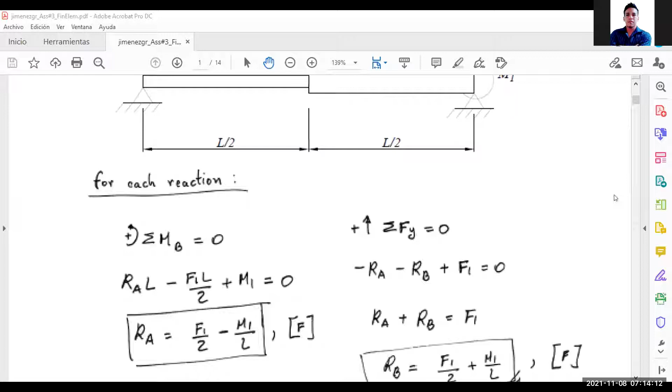Okay, so you are Mr. Jimenez. I'm going to give you permission to share the screen. I make you co-host so you can share the screen. Give me a second, Doctor. Sure, no problem. The other students, please, ask questions if something is not clear. So today, Mr. Jimenez will take my place. The second problem. Can you see my screen? People, can you see Mr. Jimenez's screen? Yes, doctor. Okay, go on.

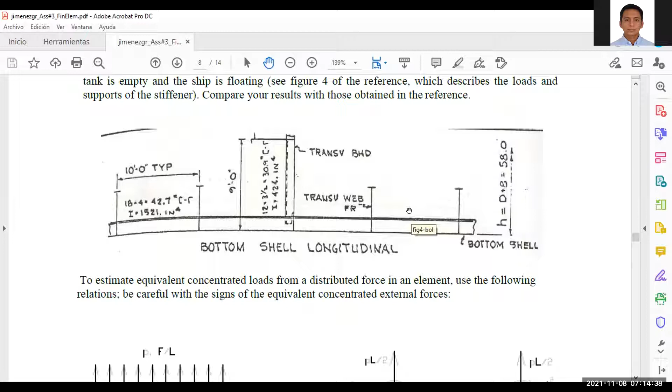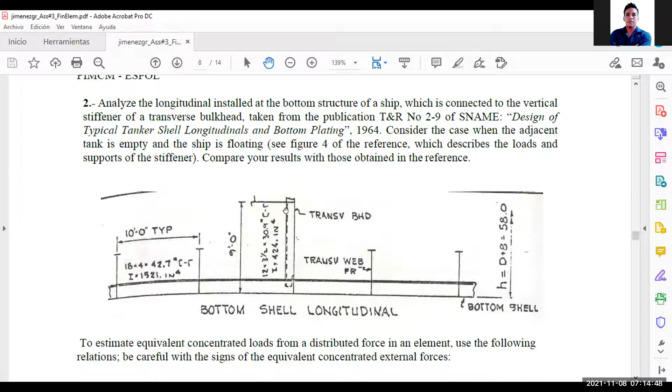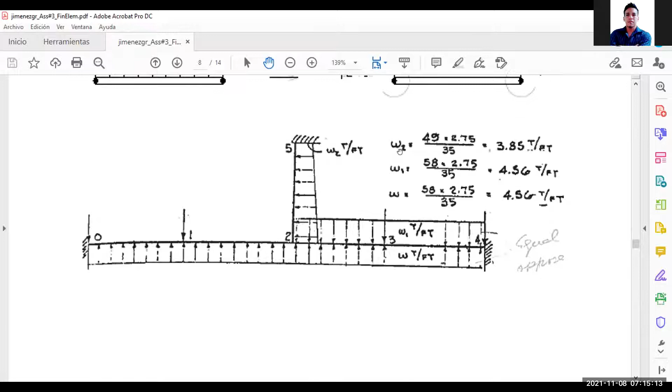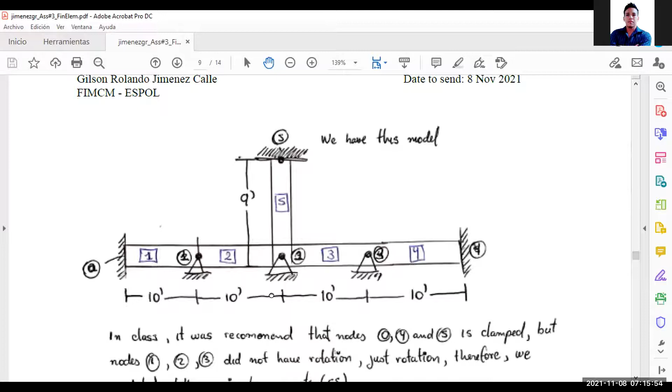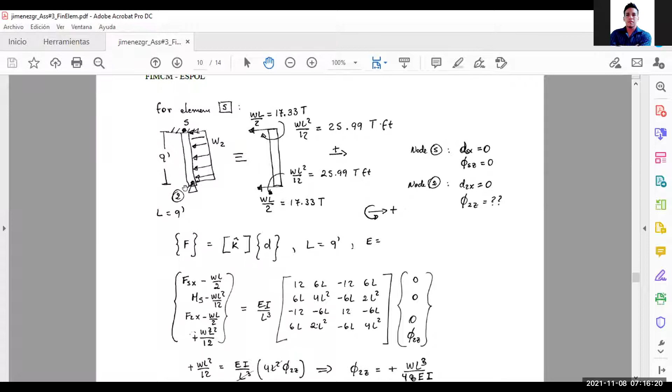For example, when we checked in the last class, you said that in the first joint we had it clamped, this end clamped, and the top is clamped. But at this point we just have rotation, no vertical displacement. Then here I'm going to analyze the element 5. I can get the rotation in the second one.

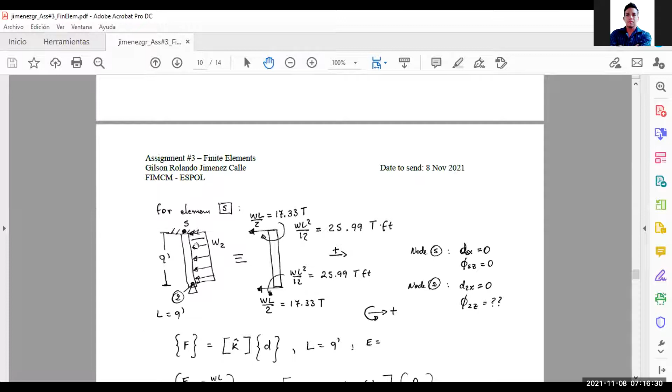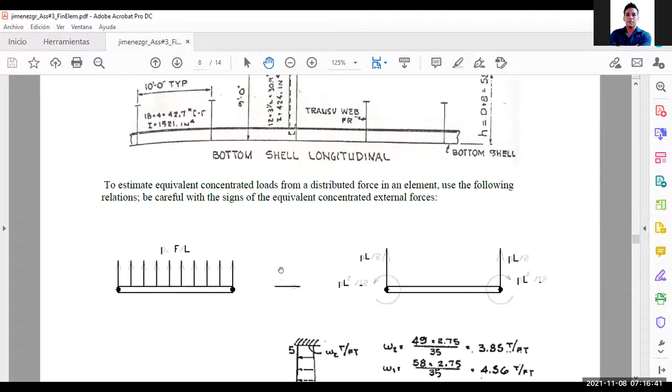This is the distributed lateral load over the beam, right? You have to consider the equivalent load on the ends of the beams, right? Now for the longitudinal, in this part we have the effective nodal force. It's like the reaction of the force and the equivalent force on the ends, right?

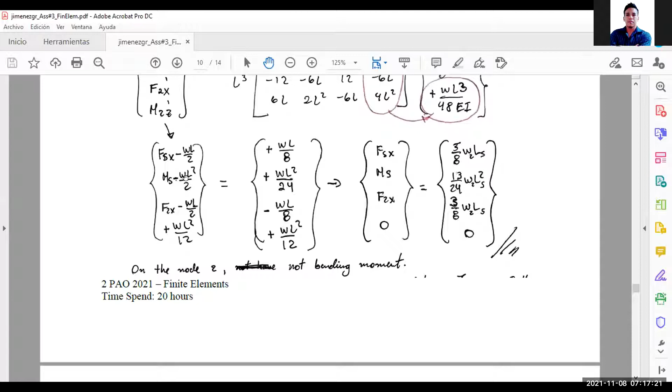For example, this is the value and this is the bending moment. No, that's not bending moment. That's external force. External moment. Right. Please remember, there is a difference between external and internal forces. Okay, go on. Sorry. No problem.

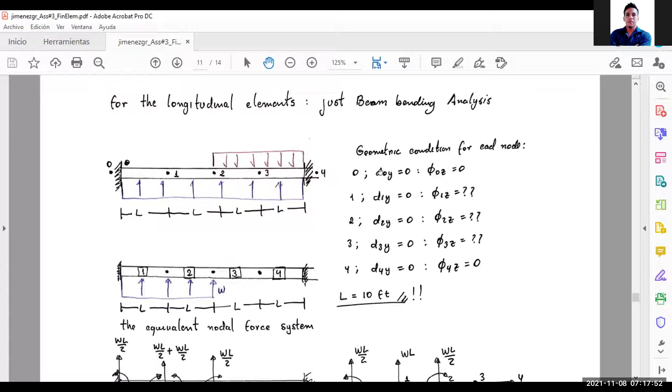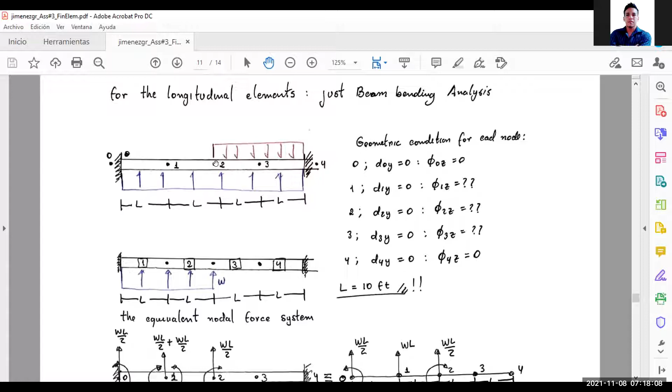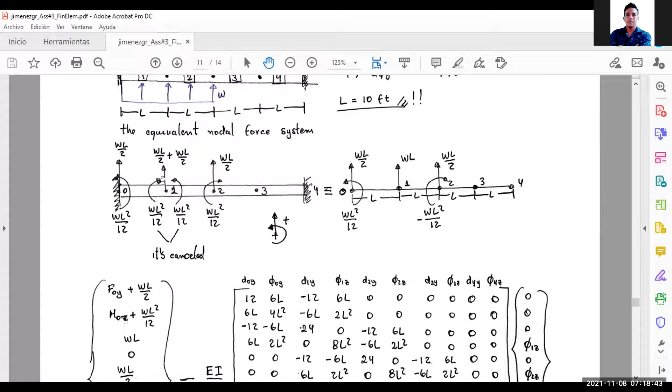For the longitudinal, we consider the geometry condition for each node, and we have this lateral load. It's the same value downward and upward in this part, just from the second node to the fourth node. And here we use the same on the right. We have the same length for each element. At the first node, we get the same external moment, and this cancels, right?

This is the equivalent system. We get the global stiffness matrix and the force vector. Just a second there. Anybody have any question, any comment on this matrix? Mr. Arias, do you have any comment on this? I don't use this matrix. I use another matrix. And why is it a different matrix that you use? I use a matrix that is symmetrical about the diagonal. This is also symmetrical.

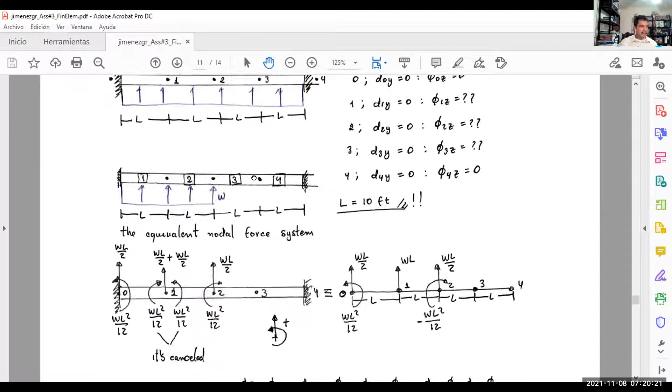Yes. But in the matrix that I use, I put the cosine and sine and the inertia. He's using the inertia here too. Yeah, but not the same inertia along the. Yeah, I know. There is something that I don't like here, but I want somebody to point it out. Mr. Zambrano, any comment on this matrix, on this system of equations? Good morning, Doctor. No, I cannot see the error, sorry. I'm not talking about errors. I'm just talking about differences.

Ms. Pinkai, can you say something about this matrix? Any comment? I also use the matrix that has sine and cosine for element 5 because it's vertical and has an angle with the global reference system. So, as a result, in this case, how many degrees of freedom did you include in your work?

18. 18. So you have 8 more than him. What's the difference? Yes, what's the difference? I didn't simplify the distributed force. No. There's something extra. Let's go on.

Miss Gutenberg, any comment on this matrix? No, I think no. No? Doctor, I think that... Who is talking? Who's talking? Arias. Okay, go on. Jimenez doesn't consider the force in direction X. Yes. That's the problem.

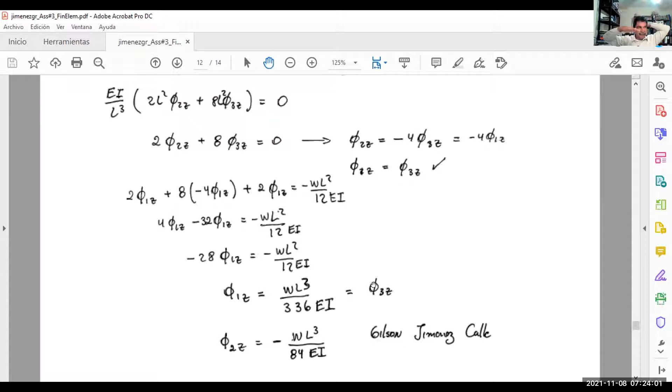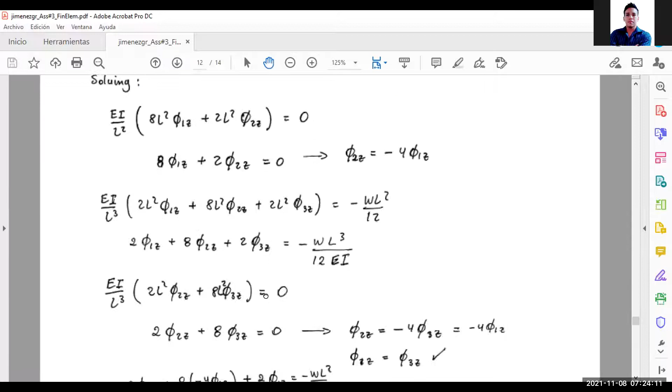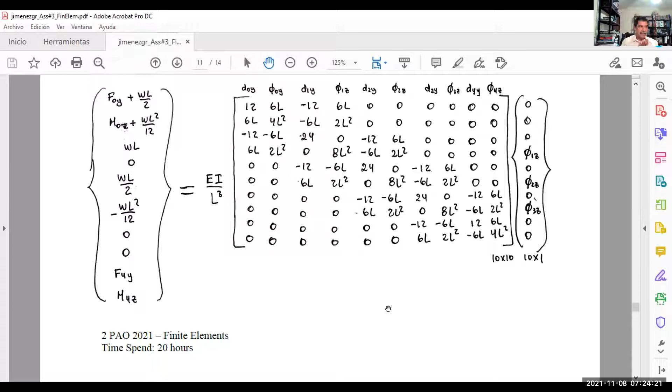Okay. But see, which is very strange... not very strange, but you are not including values so far. It would be easier, instead of handling all of these equations, to replace the matrix by values and solve it. Okay, replace them here. Yeah, what I'm saying is that instead of having it with just symbols, it would be easier to work with values. Okay, thank you, Mr. Jimenez.

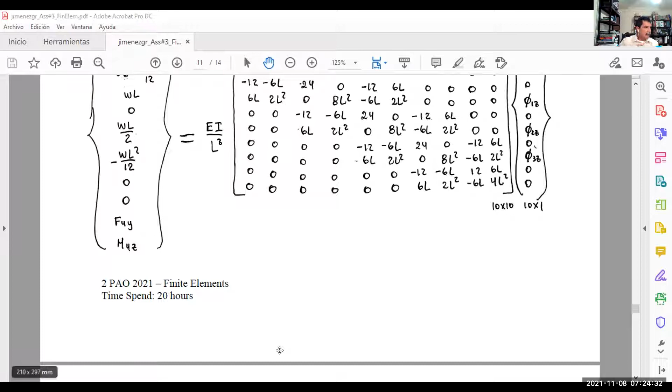Anybody else? Any other person who wants to share his or her work? Please. Or you want me to select somebody? Please, I need a volunteer. Come on, people, it's Monday. No? Okay, I'm going to select. Mr. Cano. See, I put a random number on each name, and the largest number is 0.899. Mr. Cano, are you here? No, he's not here. Okay.

Mr. Galarza? Good morning, Doctor. I'm here. But I have a problem with my Zoom. When I share the screen, the computer crashes. So let's do this: try to explain your work, especially emphasizing the differences with the previous work presented by Mr. Jimenez. In the meantime, let me open the website so I can see your work and present it, so you can explain it.

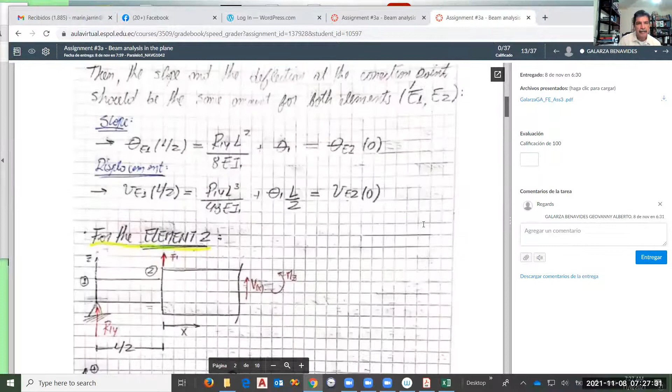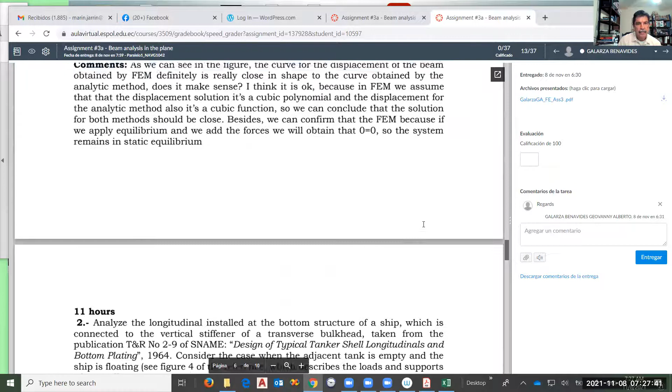So here we are. That is 3A. Let's go to Galarza. There you go. Oh, it was easy. Let me share the screen. Can you see your work, Mr. Galarza? Yes, I can see. Let me try to enlarge it. Okay, go on. Let's go to problem 2. This is your work. You tell me if I should go down or up.

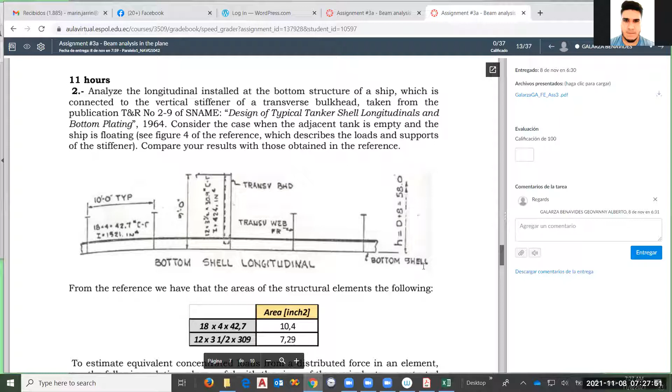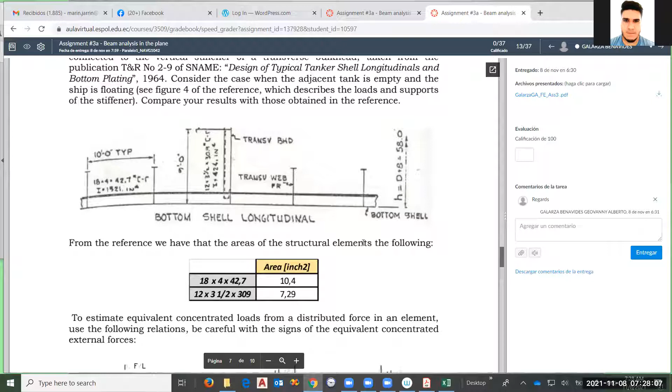So first, I was a little confused with the matrix that I have to use, so I checked the previous class. In one class, you showed us how to overlay the effect of a beam and a bar. I tried to solve that system, put it together, and found a 6 by 6 matrix. With that matrix, I started to work. This is the discretization. I consider 5 elements and 6 joints.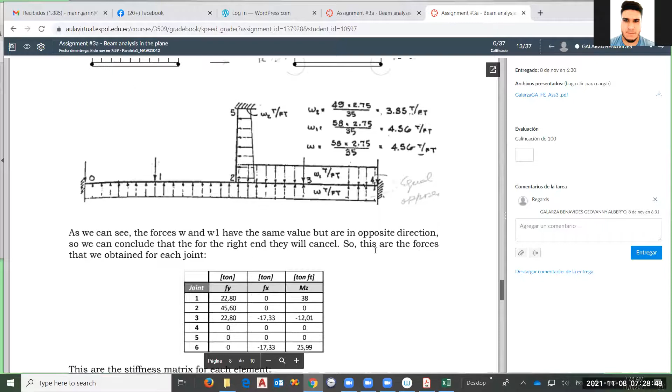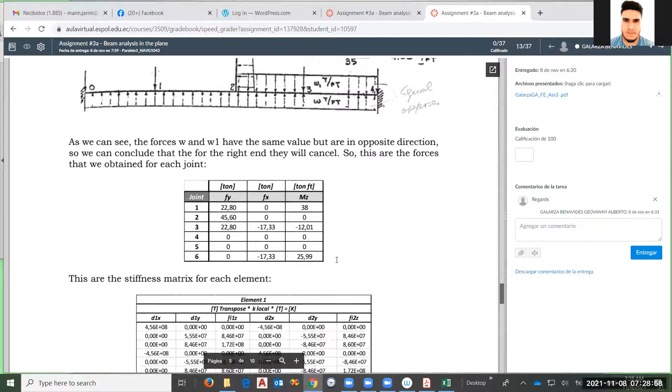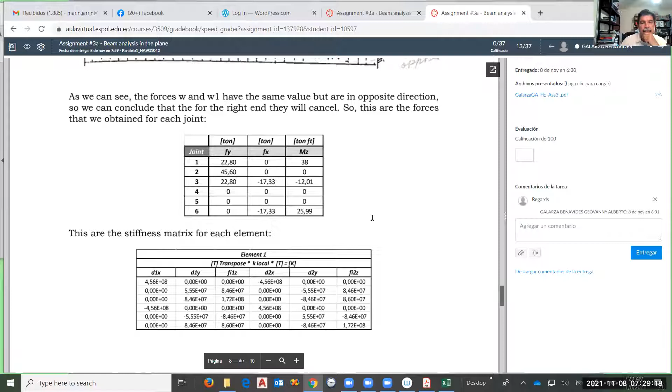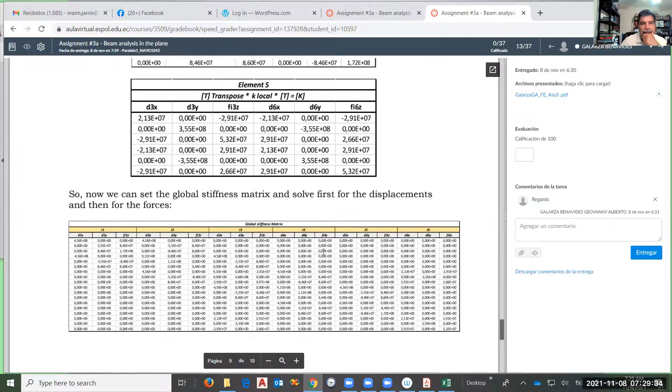And then I found the reaction forces applying the method attached in the homework. I split it in the nodes and got these values. So you have forces to the left, forces upward, and moments. Good. The forces to the left are in the vertical reinforcement. Then I found the stiffness matrix for each element in Excel: 2 for the second, 3, 4, 5. And then I have to put all in the big matrix, so I have to find the 18 by 18.

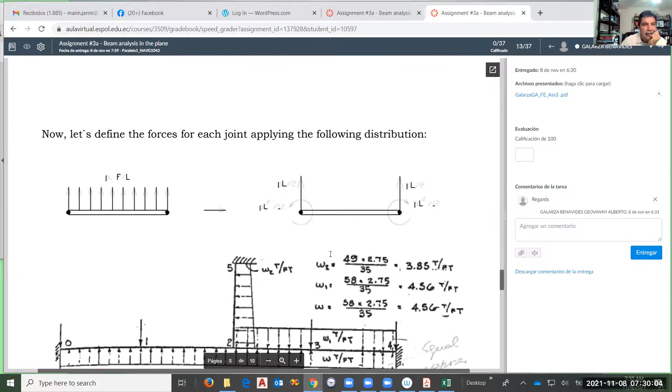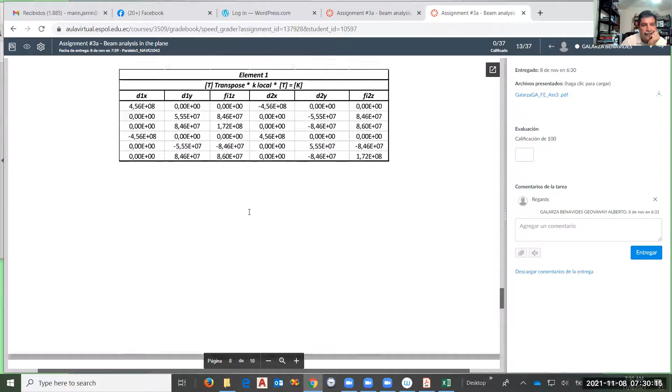Right. And I put the elements. I mean, from the horizontal stiffness, I put like 1, 2, 3, 4 aligned. Yeah. So it was easy to put in the big matrix. Let me go back just a second. Okay. 1, 2, 3, 4. Oh, this direction. And then 3, 6 is what was more confusing. Yeah. That was a different one. That was element 5. Yeah, this element 3 and 6.

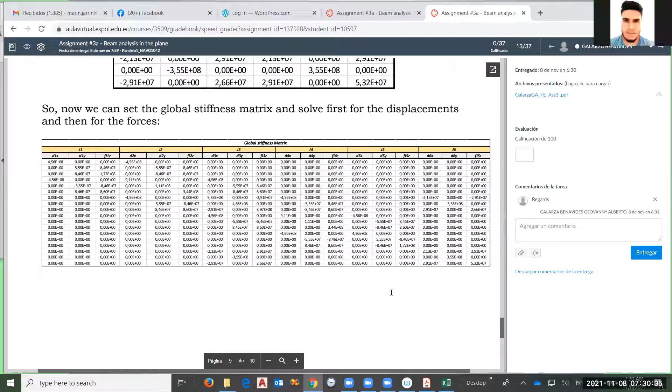Okay. Go on. So then if you go down, here to solve this matrix, I did the process that you teach us in class. Put the forces and the geometric condition. And if you go down, I have the solution. And I found the displacement. The displacement you see here in the first joint is not 0, but it's very small. Okay. Similar here.

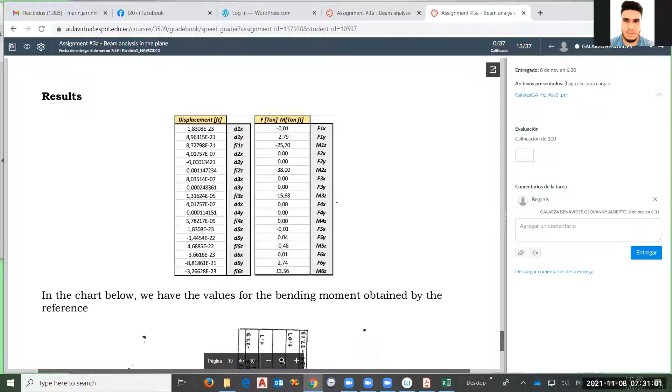And then I have the results. This is feet, and the force is in tons, and the moment in ton-feet. Okay. And then I tried to compare with those values, but honestly, I get an error a bit higher. But I think it's not about Excel, because I tested with the exercise that we did in class and I obtained the results.

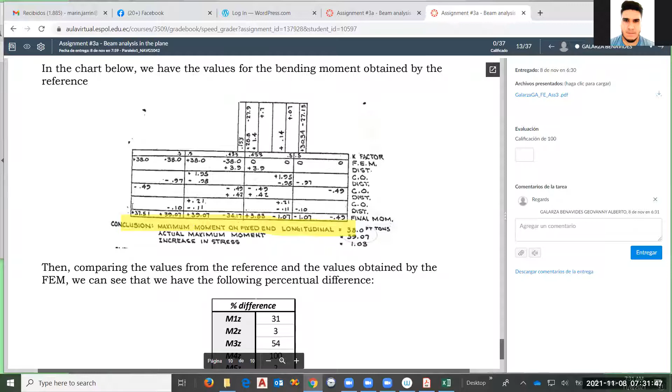So you only checked. The thing that I think I have to check is the forces, because with those forces we solve the matrix, and it all depends on the forces. I was a little bit confused when I tried to determine the force. Okay, but I think the problem here is in the joints, that's something that we were discussing last night.

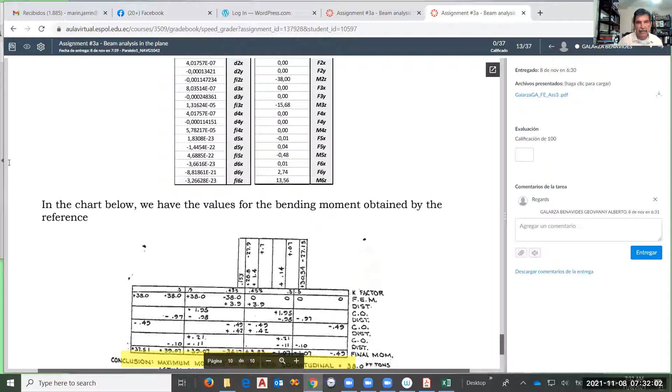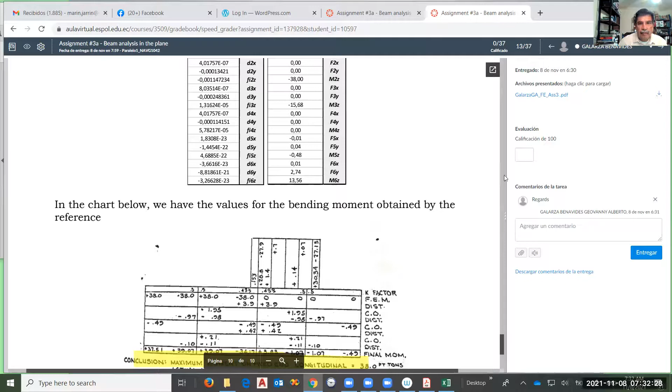Okay, let me try if I can draw on this screen. Can I? No, I cannot draw in here. No, you cannot draw here. I cannot draw here. But the thing is this, okay? Let me go back.

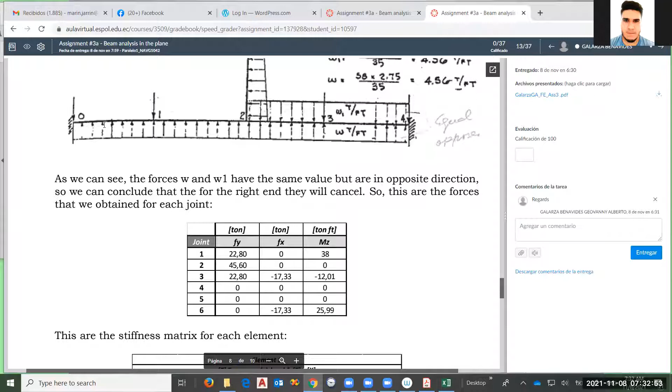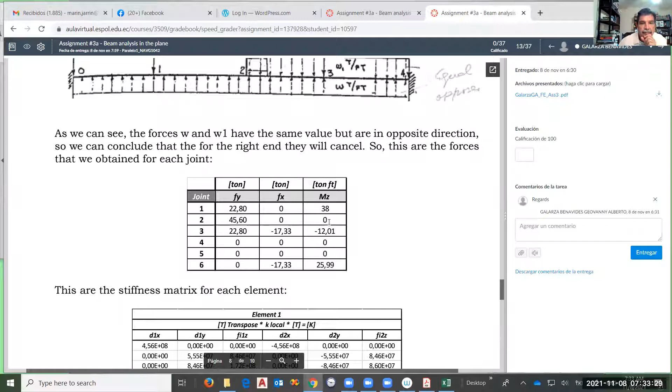For example, this is the moment, right? This moment is not the total moment here. It's not the reaction moment here. This moment is just because of the load here. So when you obtain the final value, this minus 25.7 is equal to the reaction plus the value up here, plus this one here. So you need to get this value on the right hand side, and then you will obtain the reaction. So that's something that we have to do.

This process here is something that we learned when I was at the university. It was called the moment distribution method, or the Hardy-Cross method. You start with certain values, and then you went on. In this point, when you have a connection, the moment has to be distributed. And that distribution depends on this K factor, and this K factor depends on the EI. A stronger beam would take more moment than the others.

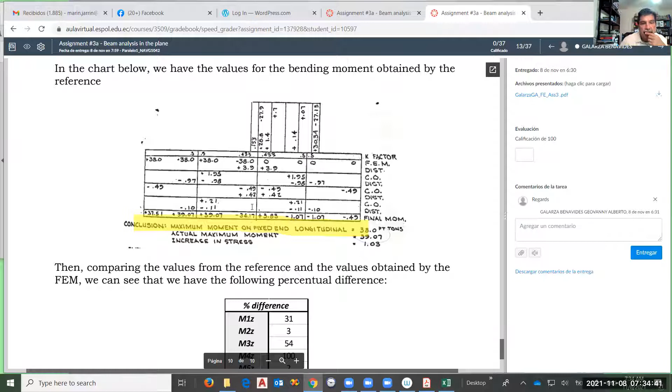And eventually, every joint has to have an equilibrium, something like this. So you iterate in order to reduce more and more the difference. So that was a very nice exercise in the past. Okay, good work, Mr. Galarza.

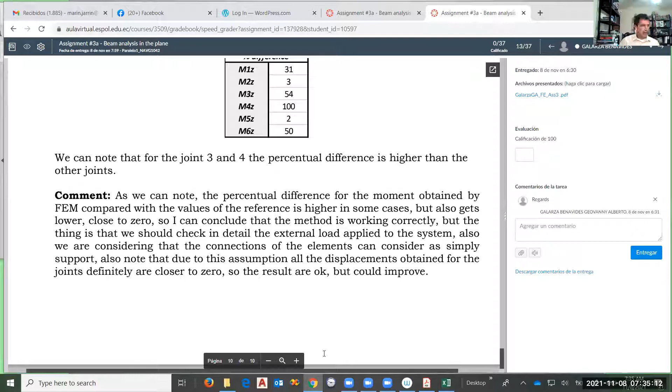How many hours did you spend on this? I spent like 20, 25, but I put like 16 because I have to correct something. No. That's good work, except for the last comment. Thank you very much. Okay. Thank you. Good work. Let's stop sharing this. There are just so many things open.

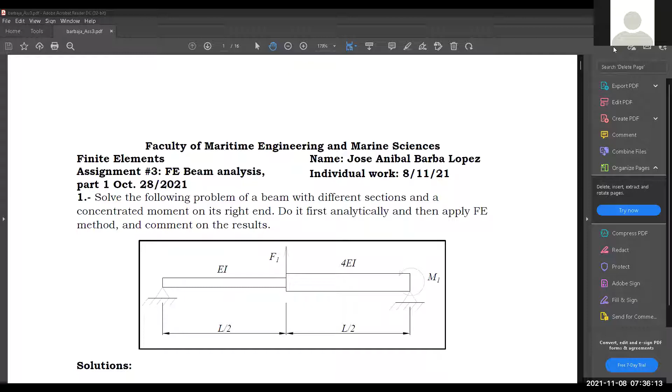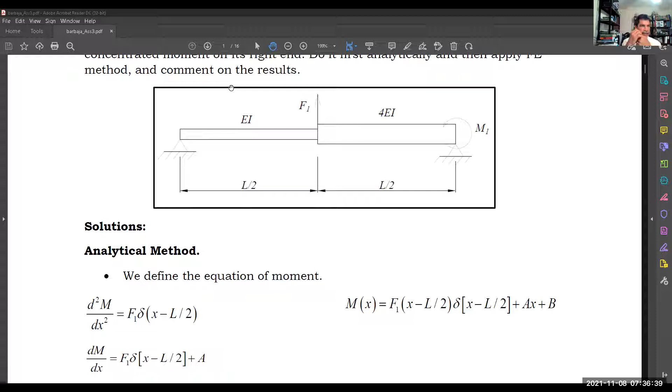Okay, do we have time for one last comment on somebody? Mr. Barba, did you complete the assignment? Good morning, doctor. Yes, I completed the assignment. Can you share the screen with your assignment? Yes, of course. One moment. Let me give you permission. There. You can share your screen now. Okay, explain the first problem to us, please, Mr. Barba. I can't hear you. Are you talking, Mr. Barba? Oh, your microphone is off. Okay. Go on.

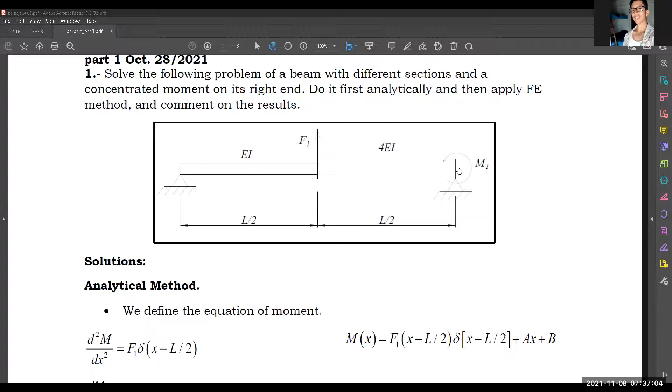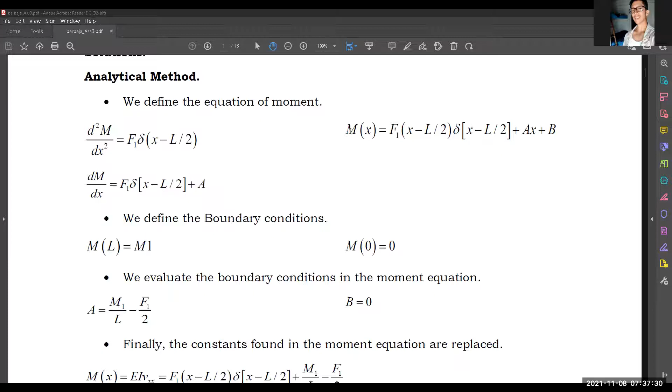In the first problem, I analyze one beam with one force at L over two, and one moment in position L. With an analytical method, we define the function and integrate. We obtain this equation of the moment. I define the boundary conditions, and replacing, I obtain these values of the constants, constant A and constant B. Okay, but M1, you do not know M1, right? Okay. Go on.

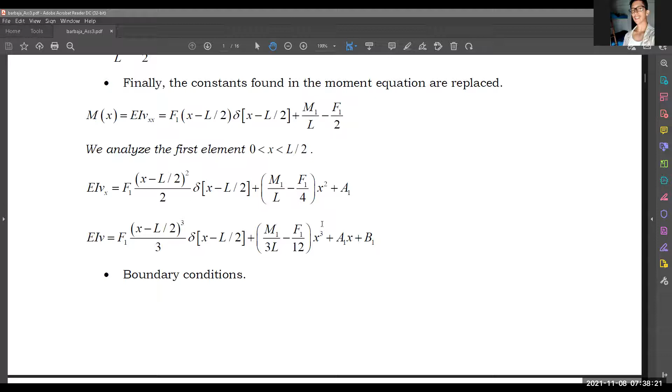I'm going to define the equation of the moment in relation with the deflection, and I'm going to integrate. After obtaining this function of the deflection, I have two constants. But in this case, I'm going to analyze this equation in two elements. The first element we're going to analyze is 0 less than x less than L over 2. I define the boundary conditions, and I obtain this value.

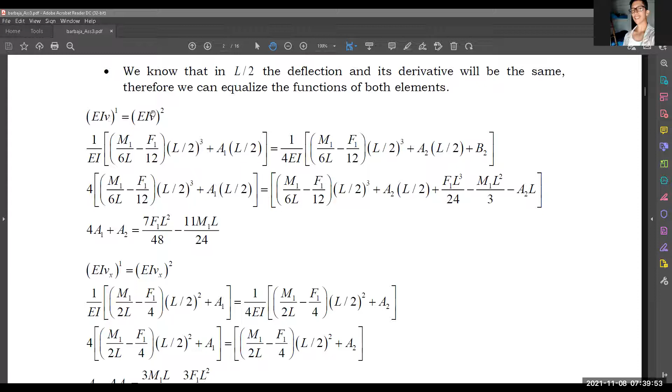The same way, I'm going to analyze the second element and the boundary condition. Now I know that at L over 2, the deflection and the derivative will be the same. In this case, I'm going to evaluate the two equations and obtain the constants A1 and A2. A1 is the first element and A2 is the second element. The same way in this.

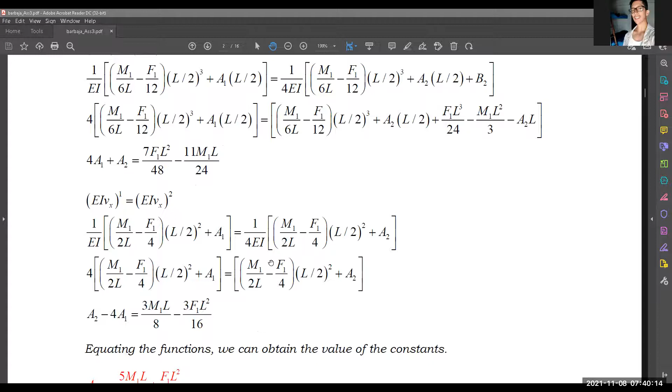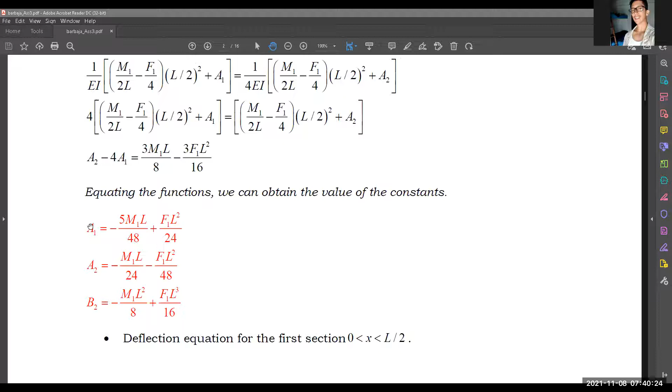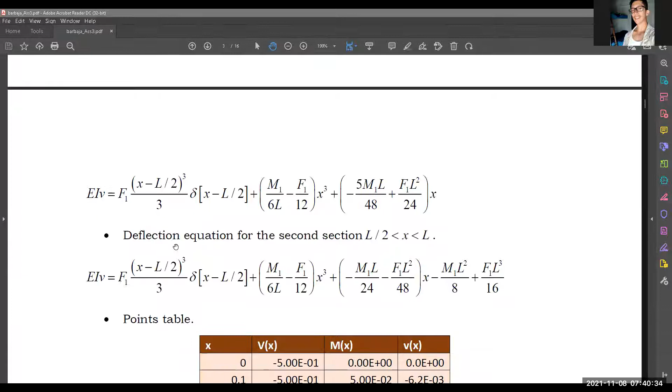Replacing, I'm going to obtain the constants of this problem. I'm going to replace in the first element this constant and in the second element this constant. I'm going to obtain the table of points for the shear force, bending moment and deflection. And I'm going to graph the external force and the deflection.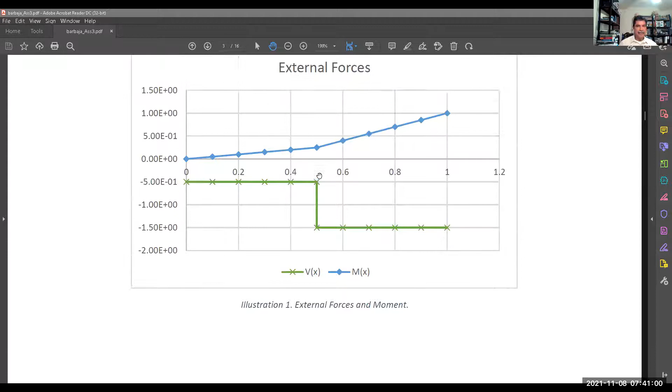Just a second. I noticed some confusion. No, that's the bending moment. The blue is the bending moment. Yes, the blue is the bending moment. Now the bending moment. Okay, go on, go on.

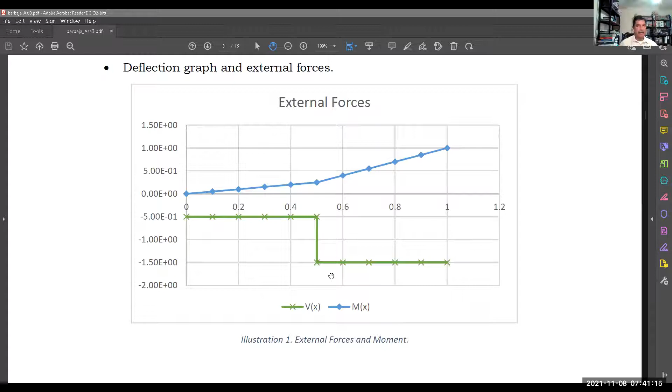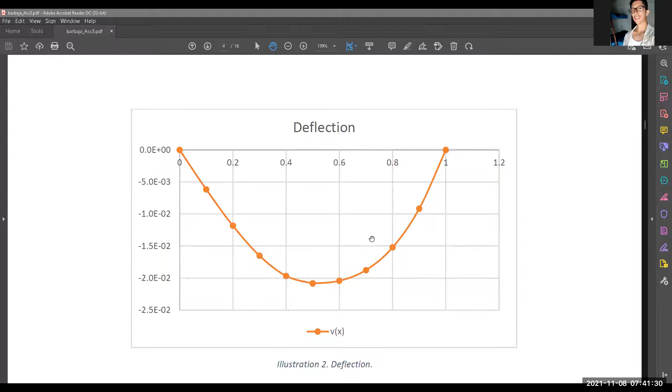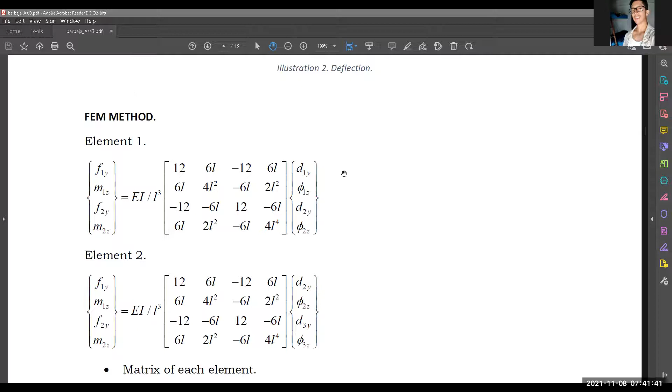I will take the graphic of the deflection. Yeah, and this is right, the deflection is not symmetric, right? It's not symmetric. No, it's not. Okay, good. And in the finite element method, I analyze two elements, element 1 and element 2, and define three joints.

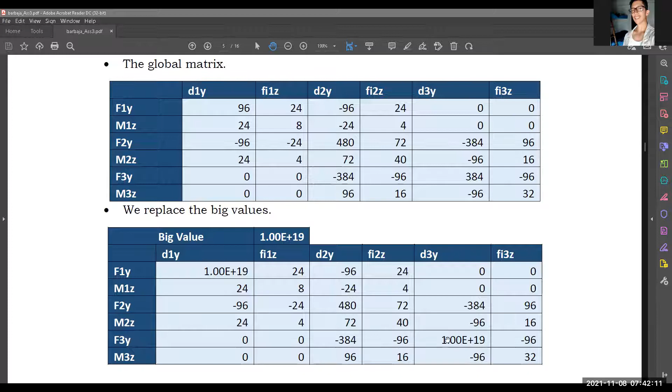Okay, I have the diagram. I define the matrix of each element, element 1 and element 2, and define the global matrix, and replace the big values in joint 1 and joint 3. I define the matrix of the external force. I place the force in joint 2 and the moment in joint 3.

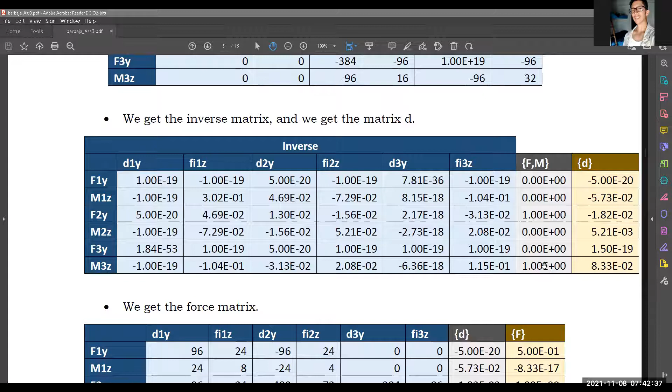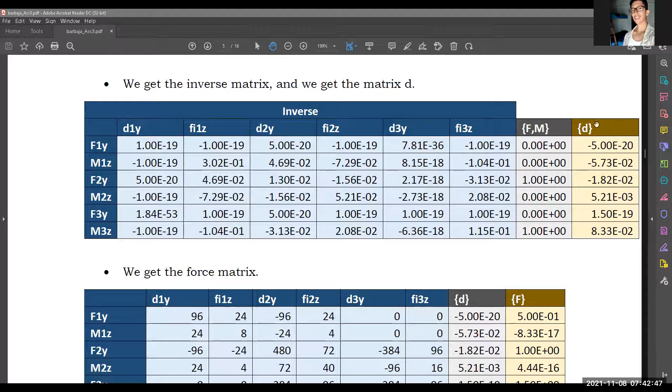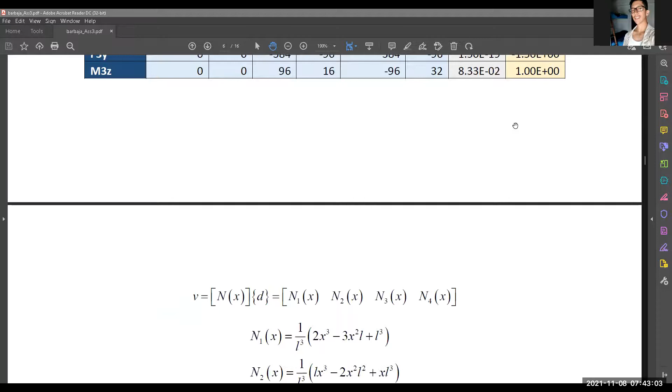Obtain the inverse of the matrix and obtain the deflection and the matrix D. And this matrix is the D global. And finally, replace the matrix D global and obtain the internal forces of the problem. And define this function. And finally, obtain the expression for the moment and the shear force.

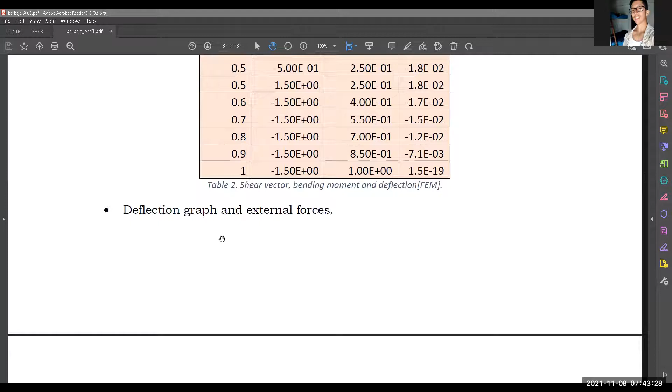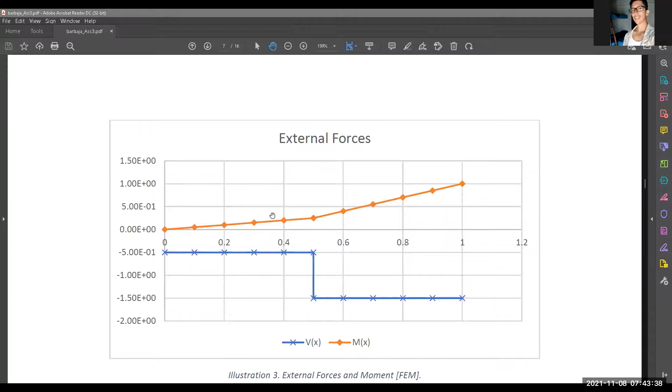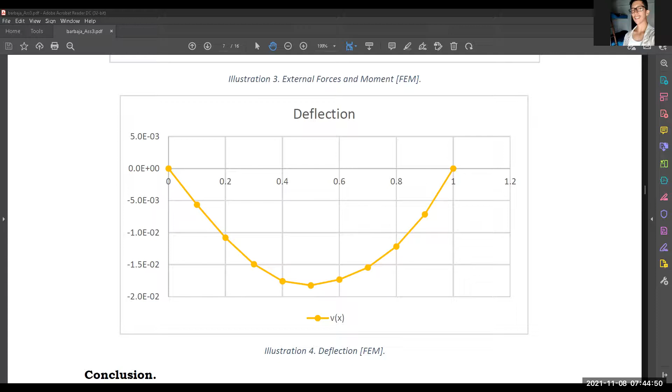But there is a problem there, because if you have concentrated forces and concentrated moments at the points where you have the joints, the analytical solution is cubic, and that coincides with the finite elements. I know this is a very long process and we can make errors here and there, but this is something we commented on in the previous chapter and in this one.

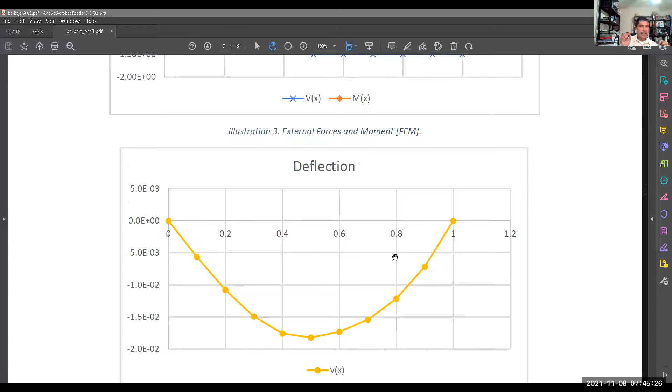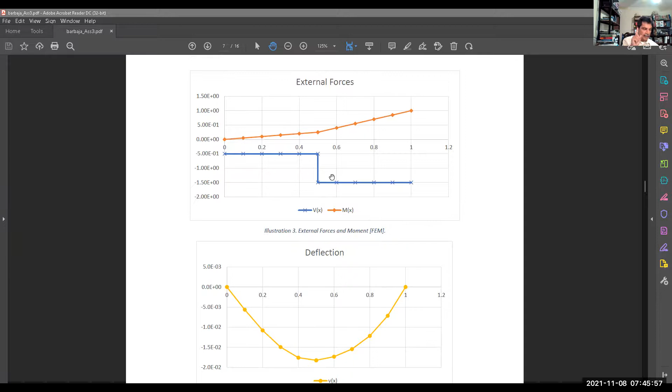I insist, in the case of bars, remember, the interpolation we employed in the finite element method is linear. If you solve the differential equation and you have no distributed load between joints, the solution there is linear. So if you assume linear and really have linear, the solution should coincide. For beams it is similar, but the solution is cubic because the differential equation is fourth order. So with external forces concentrated on the joints, you should have the exact solution from the finite element method.

Anybody who wants to make a comment about the solution of Mr. Barba? Any comment from anybody? No? What process did you like the most, Mr. Barba, the analytical or the finite element process? I like the finite element method. Yeah, I know. It's easier to analyze. The thing is this.

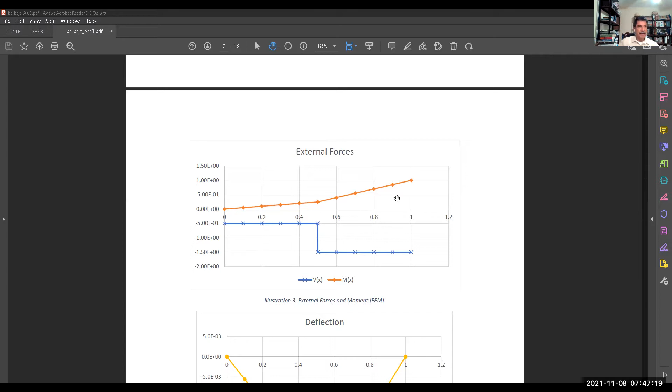In the finite element method, you get many numbers. And you will see when you start using ANSYS, you get zillions of values. From there, you have to extract information and make a conclusion. That's why we have to go first with the analytical part, as we did in solid mechanics and ship structures. Because in general, finite elements is an approximate process, so you have to be aware of that all the time. Thank you very much, Mr. Barba. Anybody want to make any comment?